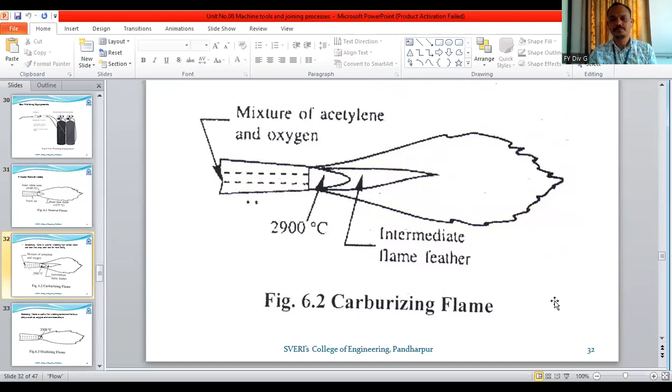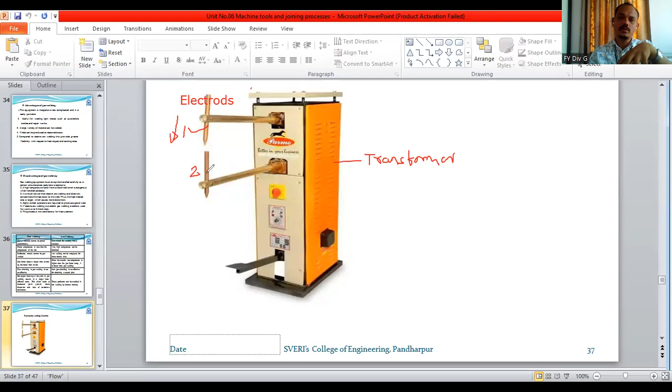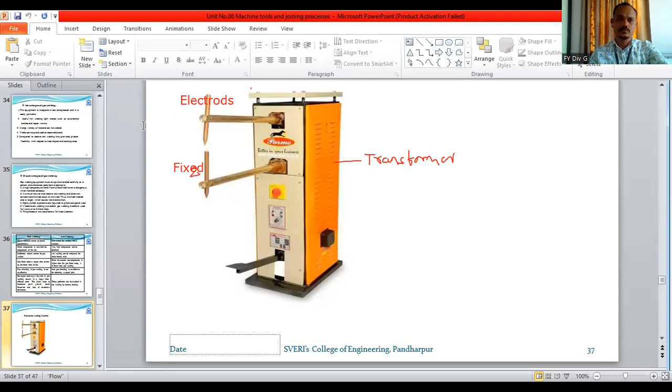And the lower electrode, this second one, is the fixed electrode. This one is movable, and the lower one is fixed. Here we have the pedal.

So this one is the pedal. This pedal is foot operated.

Now what happens? This is resistance welding where we provide the current, but here we are not melting the workpiece. As previously in arc welding and gas welding we are melting the workpiece, or melting the electrode or filler metal, and then we allow the joint to cool. Correct? Yes sir. But here we do not require filler metal also, and we are not going to melt the workpiece.

We are converting this workpiece up to its plastic level. It means, at the start when I told you about joining processes, there are two types: the first one is the fusion process, where we are melting the metal and by melting the metal we are conducting that joining process. And another process is the plastic welding.

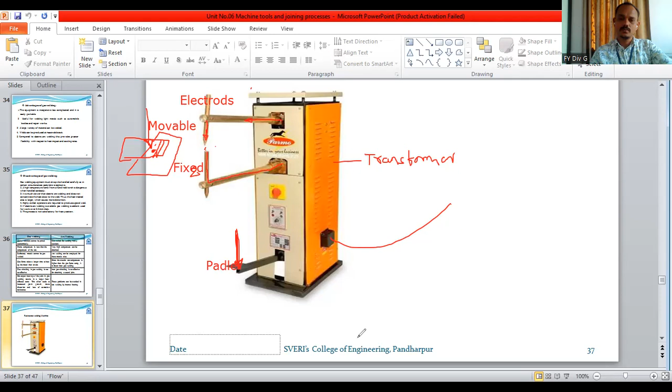See this? So this one is the resistance welding. Whether audio is... No, sir, no audio. Okay, I will stop. And once again.

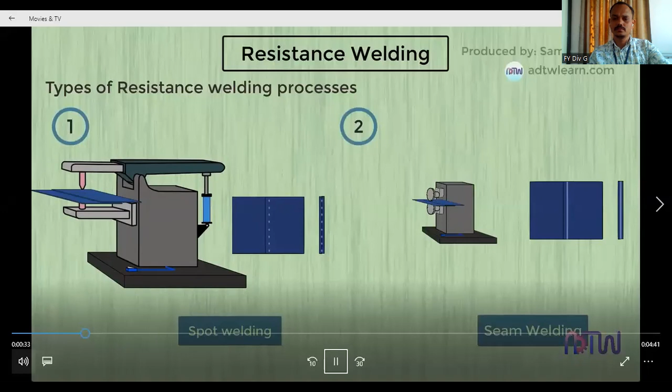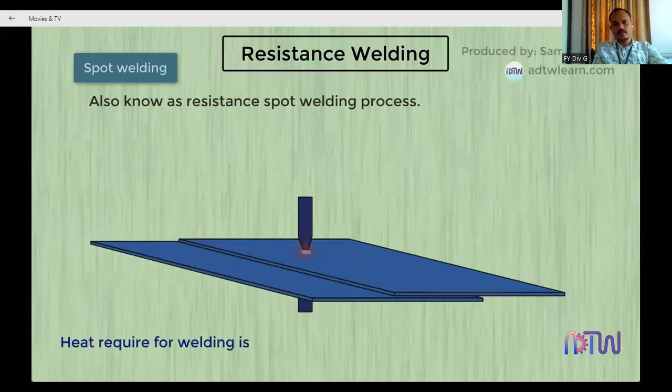Spot welding is also known as the resistance spot welding process. It is used to weld thin sheets of metal together by applying pressure. The heat required for spot welding is generated by resistance to the flow of current through the electrode. This is a very simple working principle.

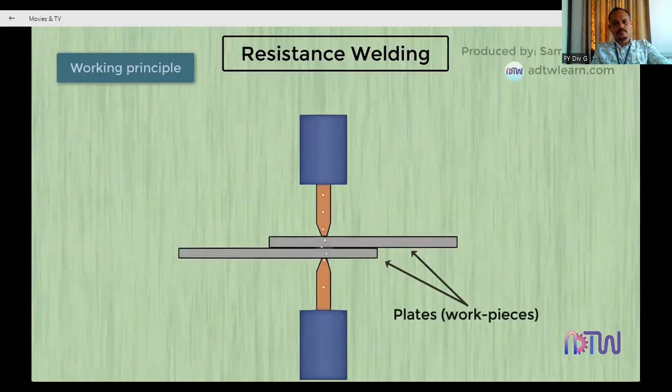The welding electrodes are made up of copper, which is a good conductor of electricity. The movable and fixed electrodes of the spot welding machine are held in pressure on either side of a pair of plates to be welded together. As the current passes, it experiences resistance between the electrode and workpiece contact and generates heat. This heat causes the interface of the workpiece in contact with another workpiece to melt, and pressure fuses the two metals, thus forming a solid bond.

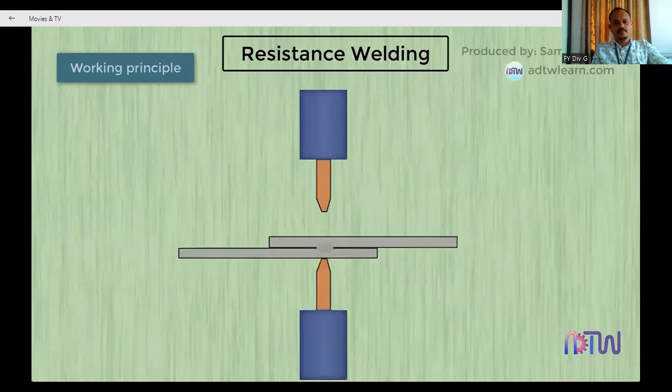Equipment required: spot welding machine, tongs, also known as electrodes. Working of spot welding: when the power is turned on, the transformer supplies low voltage high current to the electrodes made up of copper. These electrodes are held in pressure against the pair of workpieces to be spot welded with the help of tongs.

The current flows from the tongs to the electrodes, as copper is a good conductor of electricity but faces resistance at the point of contact between the two workpieces. This resistance generates heat at the metal-to-metal interface and causes the two metals in contact to melt. Then the pressure causes the molten metal to fuse together, and thus a solid bond is formed.

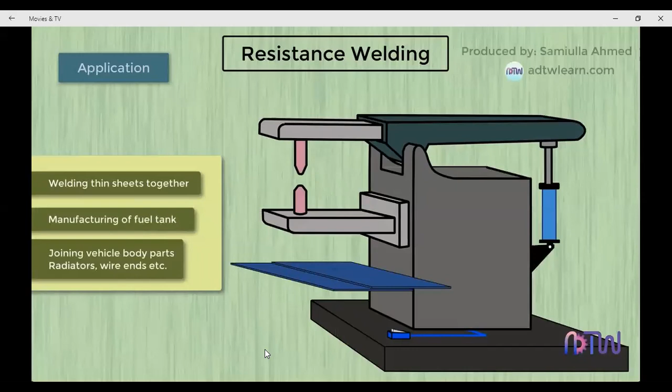Application of spot welding. Spot welding is used for welding thin sheets together, in the manufacturing of fuel tanks, joining vehicle body parts, radiators, wire ends, etc.

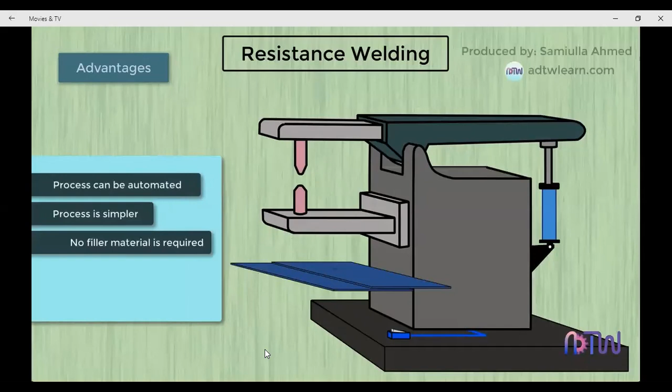Advantages of spot welding: the process can be automated, it is simpler, no filler metal is required, low or no fumes are generated, and a high welding rate is possible.

Limitations of the spot welding process: the initial cost is high, there is low strength due to discontinuous weld, and the process is limited to the thickness of the metal.

Seam welding: the workpiece is supported on both sides by a pair of electrodes. These electrodes are in the form of rollers to produce a continuous weld on the workpiece. Continuous spot welding is known as seam welding.

The working principle of seam welding is similar to that of resistance spot welding. The equipment and components used in the process are the seam welding machine and roller electrodes.

Working of seam welding: when the power is turned on, the transformer supplies low voltage high current to the roller electrodes, made up of conductive materials. These roller electrodes support the pair of workpieces to be welded together.

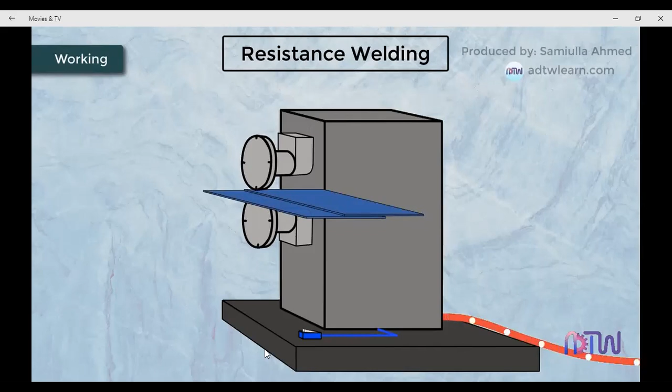When the rollers are made to contact the workpiece, the current flows easily through the roller electrodes with low resistance, but experiences high resistance at the metal-to-metal interface between the upper and lower plates to be joined. This high resistance raises the temperature to the fusion point at the workpiece interface, and a weld is generated in the form of a nugget.

A nugget is the weld formed between the two workpiece interfaces.

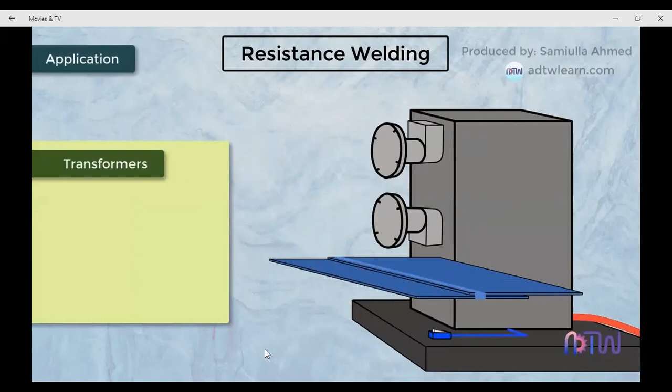Application of the seam welding process: welding of transformers, paint containers, gasoline tanks, automobile mufflers, and sheet metal tanks.

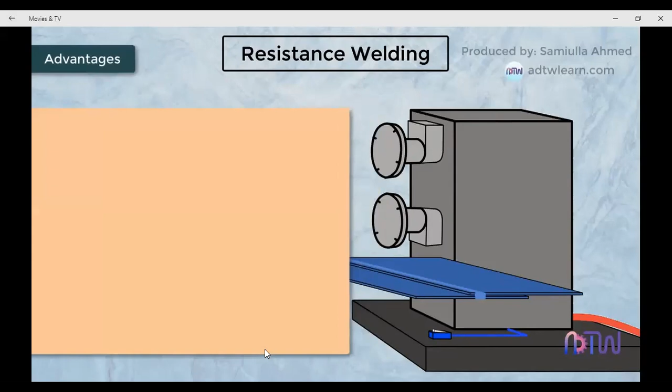Advantages of seam welding: it can generate a leak-proof weld, the production rate is high, dissimilar metals can be welded together, no filler metal or flux is needed, the process can be automatic or semi-automatic, it is possible to weld thin metal sheets, and a semi-skilled person can also produce a good weld.

Limitations of seam welding: the process is suitable only for thin sheets up to a thickness of 3 mm, since the electrodes are in the form of rollers they can weld only along a straight line or well-curved path, and the process is limited to lap joints.

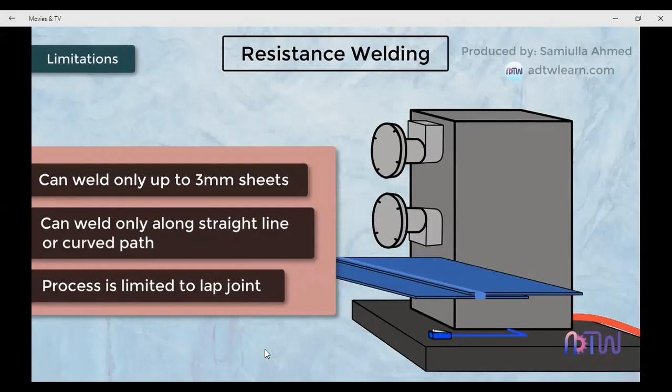I hope you have understood resistance welding and its types. It takes lots of effort.

Have you understood? Yes, sir. Yes, sir. Okay, this is the animation.

Now I will show you a video from industry. One video we have from the industry, so let's see how they do it.

Video this way. Yes, sir. Okay, now you can observe here how in industry this resistance welding machine works, or spot welding. Now see that.

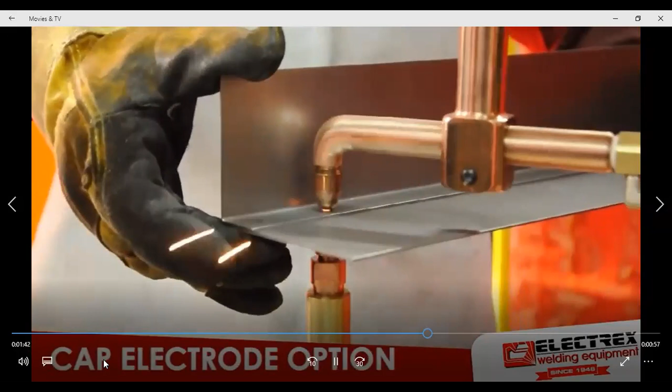See, this one is another operation.

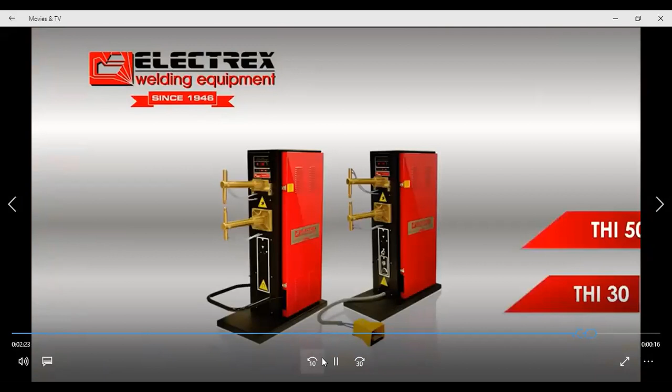Okay, understood? Yes, sir. So this one is the resistance welding, which is used to make some light joints.

If you want to join some structure, like a leaf spring of the truck, have you seen a leaf spring?

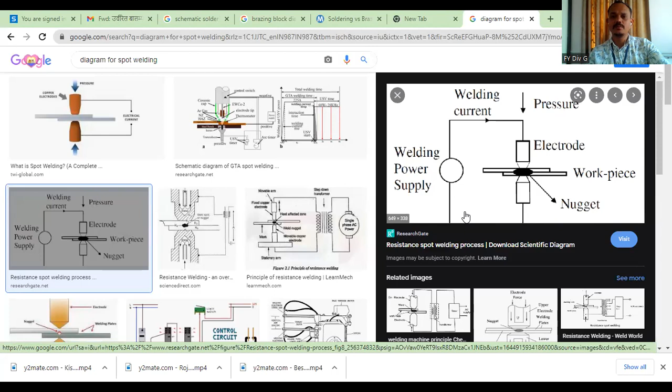Okay, a simple diagram is there. I have chosen a very simple diagram, so you can easily draw it.

One more, this one is also a nice diagram, but the previous one is good. Okay, this one is okay, so you can draw it easily.

Write the heading resistance welding. In resistance welding there are two types: spot welding and seam welding. After that, draw the spot welding diagram.

After completion of this diagram, please tell me.

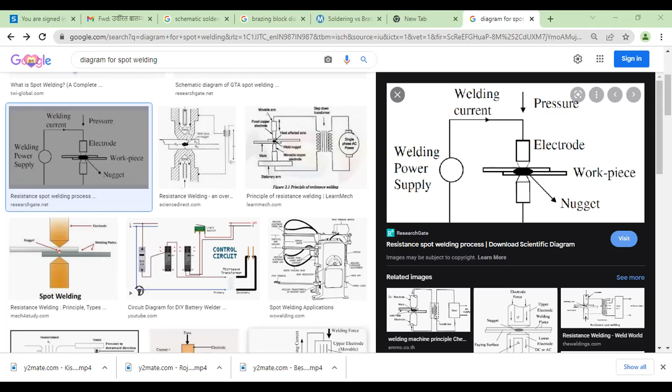So again we will proceed. Now these are the advantages and disadvantages that you have to write. So first advantage, no filler metal required. High production rates possible. Lends itself to mechanization and automation.

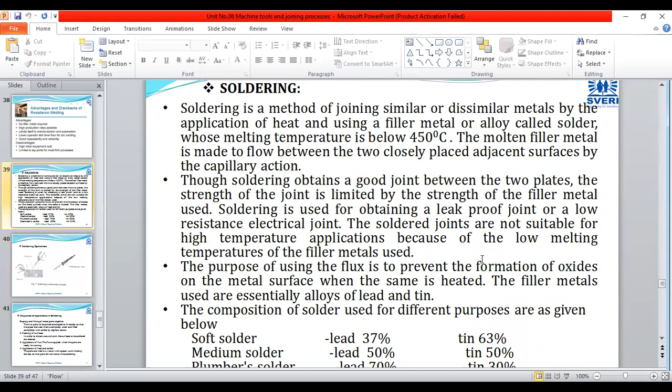So as we are using this joining process up to 450 degrees Celsius, it means we are using filler metal which is having low melting point. So mainly here you can see lead and tin, lead-tin combination filler metal, or that wire. Have you seen that wire? Yes, sir.

But generally, in the local market, we are not choosing that for soldering.

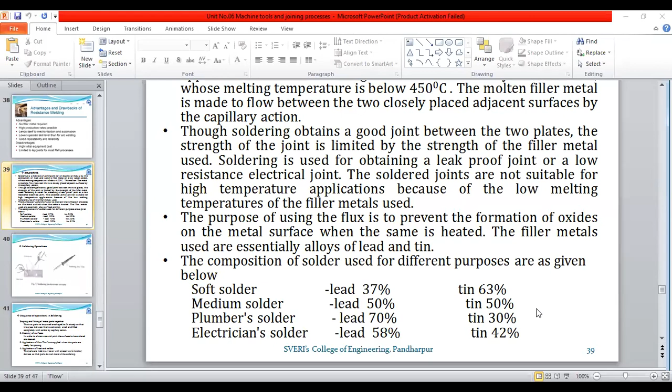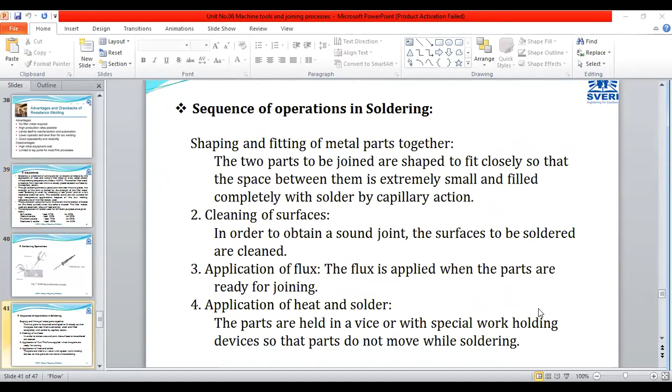So first, the shaping and fitting of metal parts together. It means when we have to do a soldering operation, suppose these two plates are here, like this, and another plate is here, which has a straight surface. If I want to join these two plates, this is the first plate, and this one is the second.

So if I have to join these, is the shape of this plate and this plate similar? No, sir. So what happens when I add filler metal here in between these two? The filler metal cannot create a joint if there is a big gap between the two plates. So for that, I have to finish this surface like this one.

So that after finishing, the plates should keep a very minimum distance between these two. Now I can create a joint with soldering. Understood? Yes, sir. So the shaping and fitting of metal parts together is very important for soldering, because soldering has its own limitations.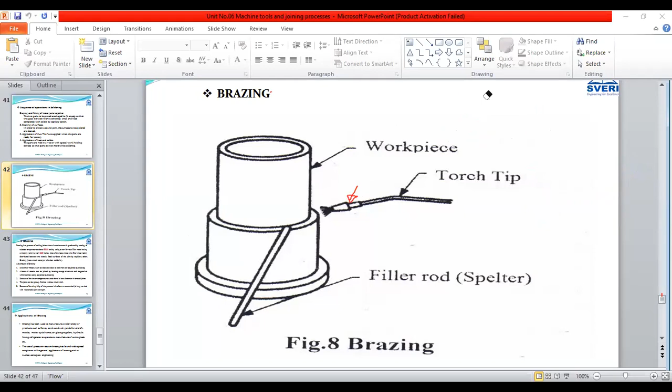Okay, another brazing process is the chemical brazing process. Okay, but we don't want to go that deep. So this one is the simple brazing process. Have you understood this? Yes, sir. This brazing process is the same as gas welding. This is the brazing process, which works above 500 to 900 degrees Celsius. Okay, so I will show you one or two videos so we can understand.

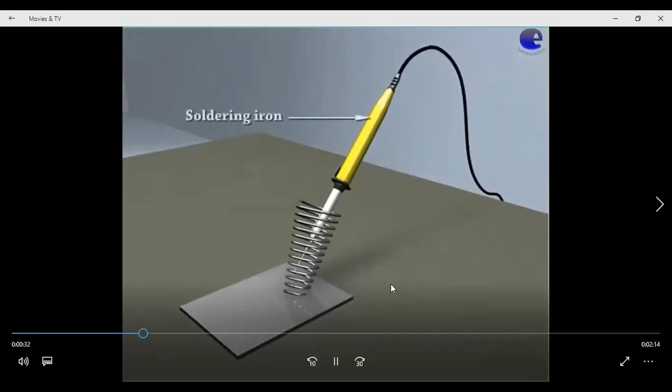Soldering. Okay, is this visible? Yes, sir. So see here, this one is the soldering gun, this is the stand, this one is the IC circuit. Sir, is the solder filler metal aluminum? No, it is lead or a mixture of lead and tin. It looks like aluminum. Okay, sir.

Yes, sir. So this one is the IC circuit. If I want to join the capacitor and resistance on this IC circuit, and if I use arc welding here, okay, what will be the result? Do you understand my question?

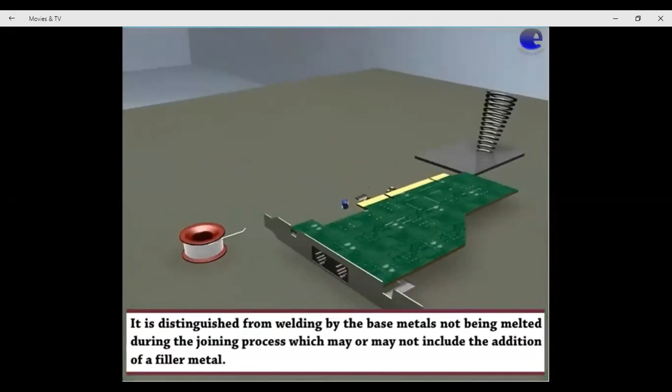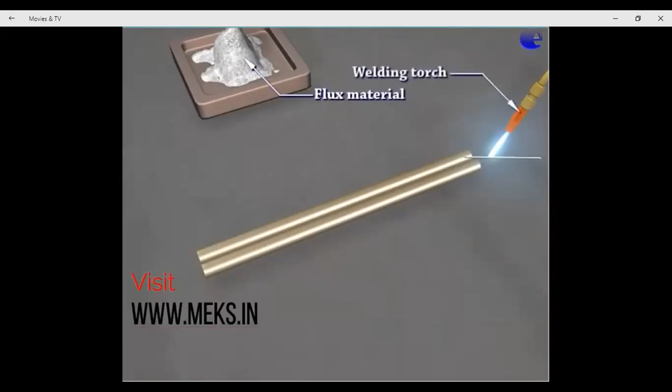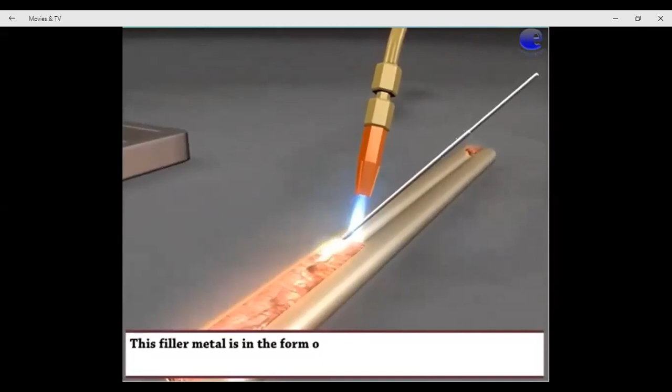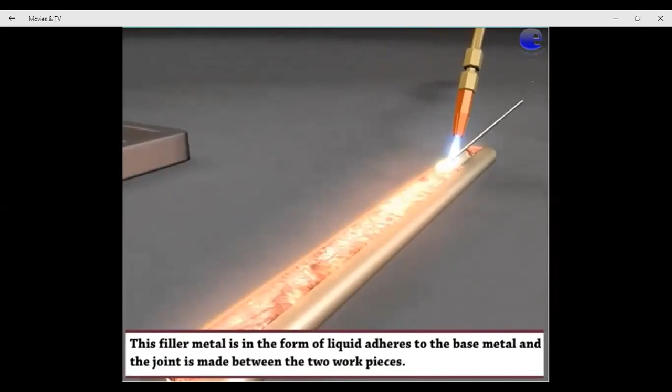Resistor, capacitor. I don't know all the parts because these are from electronics. Some parts I can recognize. So this is also a very simple process. So this one is the brazing process now. Torch brazing. As we are using a torch here, this one is the flame, and here we are melting only the filler metal.

I have one more video related to this. This is the video. This is related to brazing mostly.

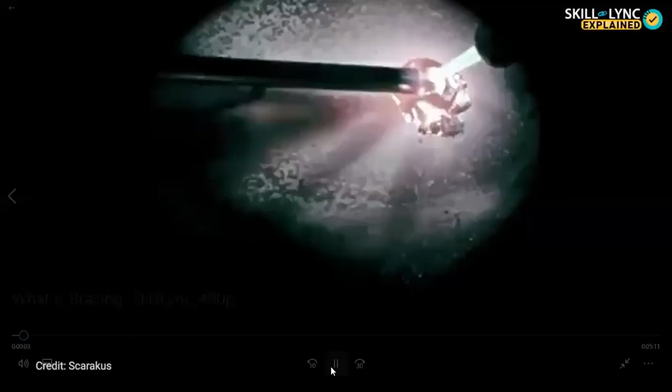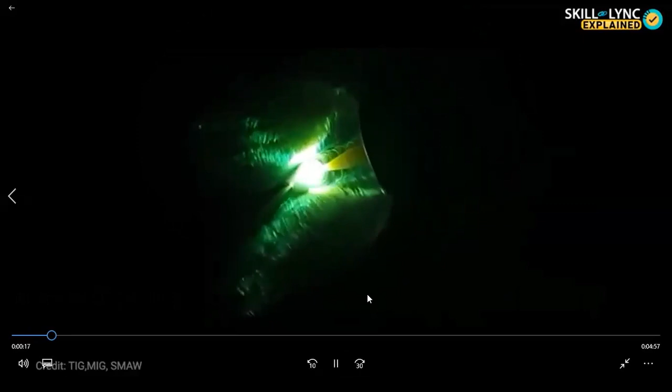Brazing is a type of fusion welding process which is similar to gas welding, yet different. Usually in most welding procedures, the base metal is also melted along with the filler metal. This does not occur in brazing. Here, only the filler material is melted. In brazing, the filler metal, which is also known as the brazing metal, has a melting temperature above 450 degrees centigrade, but it is below the melting point of the base metal.

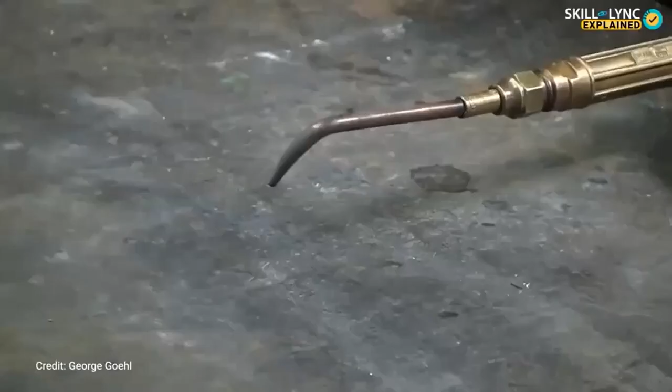There are many types of brazing that are generally available. Each of these types has a specific application. The first type of brazing we will be talking about today is torch brazing.

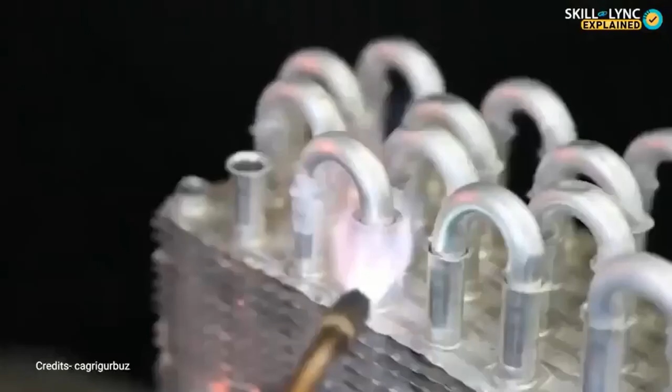In torch brazing, a flux is applied to the surfaces to be brazed. A torch is used to direct a flame against the workpiece and towards the joint. An oxygen-starved flame is typically used to prevent oxidation on the workpiece. Once the joint areas have reached suitable temperature, the filler wire is added. Due to the high temperature, the filler wire melts and creates a joint.

The torch, which is used in brazing, is similar to the ones used in gas welding. The fuels used in the torch vary based on the type of workpiece and filler used. Acetylene is used if the filler or workpiece has very high temperature tolerance, as acetylene burns at almost 3000 degrees centigrade. The torch brazing is mostly performed manually.

The skill of the workers is crucial, as they must be employed to control the flame, manipulate the handheld torch, and also properly judge the temperature of the flame. This is done to ensure that a proper joint is obtained.

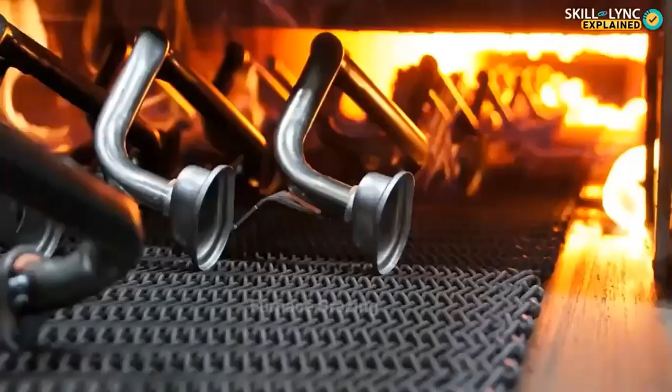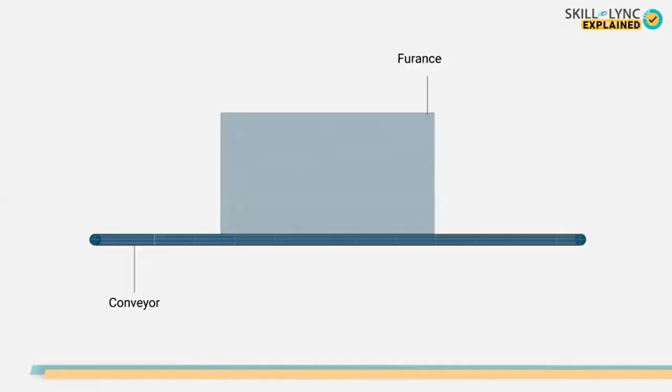Next is furnace brazing. In this type of brazing, a furnace is used to supply heat for brazing and is used to mass produce parts. It is suited for medium to high production rates of components. In furnace brazing, the parts and the brazing metal are loaded into the furnace. They are then heated to brazing temperature. This melts the brazing metal, which fuses the joints. The workpiece is then cooled and removed.

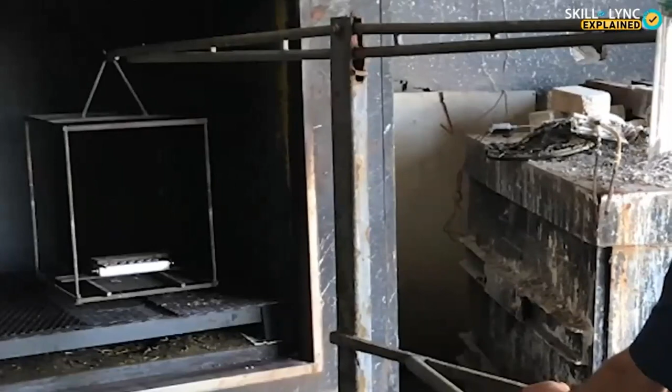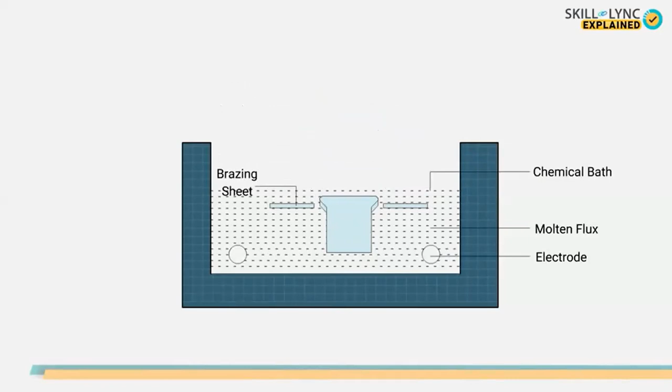The next type of brazing is dip brazing. In dip brazing, a molten salt bath or a molten metal bath is used as a heat source. The workpiece and the brazing metal are immersed in the molten bath. The molten salt bath generally has a molten mixture of fluxing ingredients, whereas in the metal bath method, the filler material which is used to join the workpiece is the heating medium.

The molten metal is drawn into the joint by capillary action during submersion. Dip brazing method is generally used in places where the workpiece has a lot of joints. So, by dipping it in salt or metal baths, it is much easier to fuse the joints faster.

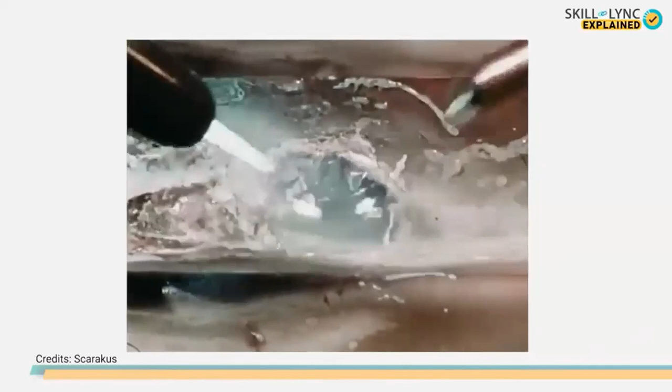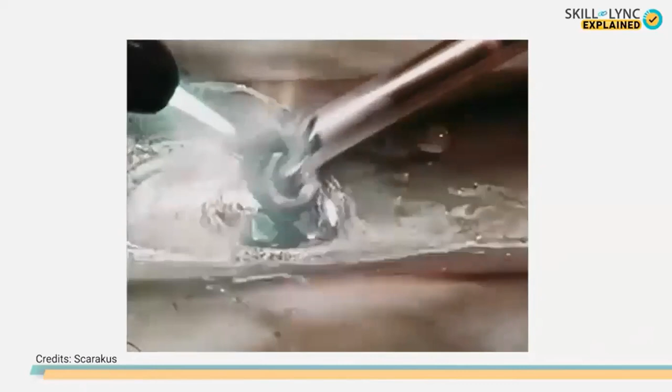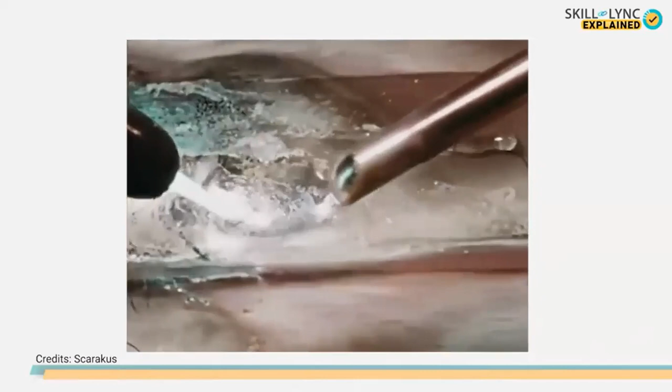The next type of brazing is called braze welding. Braze welding is somewhat similar to gas welding, where a filler wire is used to join two or more pieces of material. In gas welding, both the base metal and the filler are melted and then fused together on solidifying. Whereas in braze welding, the joint consists only of filler metal. This is because the base metal does not melt and therefore is not fused to the joint as in conventional fusion welding processes. Braze welding is most commonly used in repair work of pipes, beams, etc.

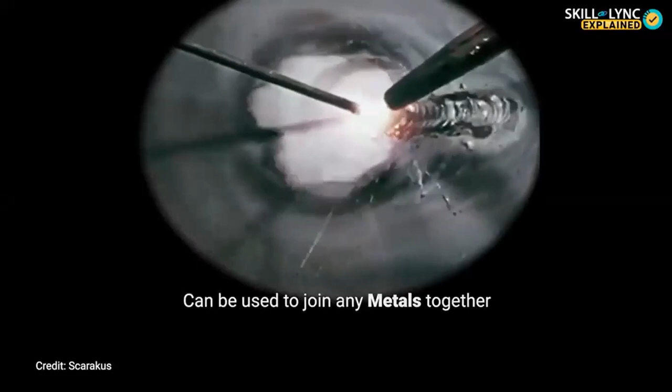Brazing has several advantages when compared to welding. Any metal can be joined with the help of brazing, including dissimilar metals, whereas this is not possible in most welding types. A few brazing methods like furnace brazing and dip brazing can be performed quickly and consistently. This permits very high production rates and allows the process to be automated. Some methods also allow for multiple joints to be brazed at the same time.

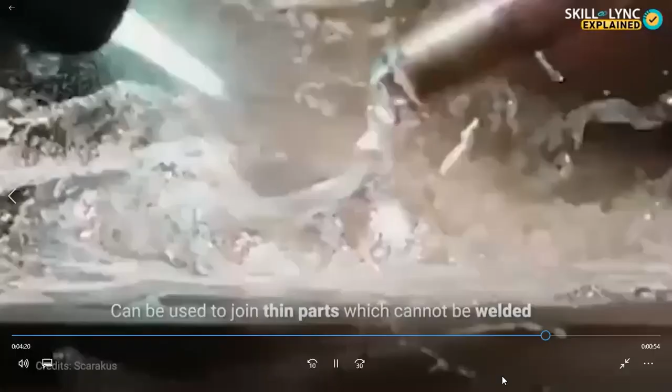Brazing can be applied to join thin parts which cannot be welded. This is normally done by infrared brazing, where an infrared lamp is used to generate heat. Brazing in general also requires lesser heat and power than most fusion welding processes. But the downside to these advantages is that the strength of the brazed joints is lesser than the welded joints.

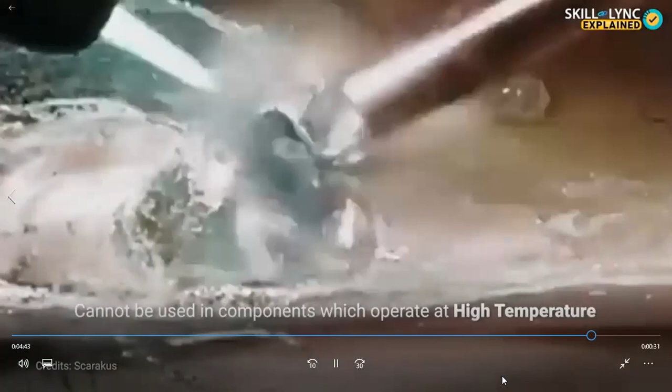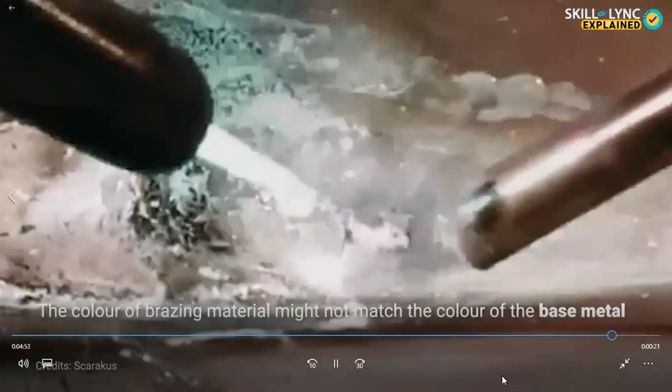Brazing cannot be used to join components which are required to operate at locations with high temperature. This is due to the low melting temperature of brazing metals. Another intriguing disadvantage of brazing is that the color of the brazing metal and the base metal might not match sometimes. This might not be aesthetically pleasing at some places.

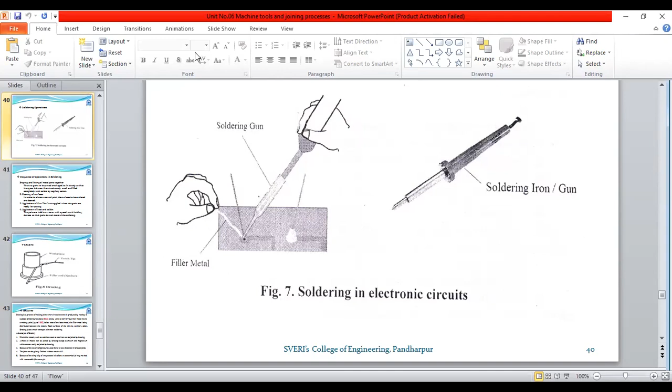With this, we have completed the sixth chapter, that is manufacturing machine tools and joining processes. So in machine tools, we have seen two important machines, that is the lathe machine and the drilling machine. In that we have seen construction of the machines and what operations we can perform on the lathe machine and the drilling machine. After that, we have seen joining processes. There are two different types of joining processes. First one is permanent joining and second one is temporary joining.

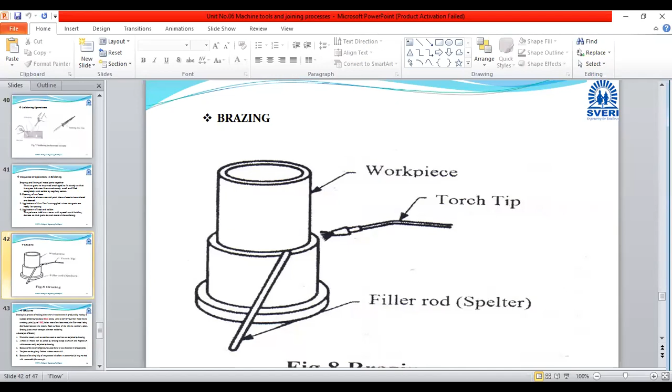In permanent joining, in our syllabus, we have arc welding, gas welding, resistance welding, soldering, and brazing. For heavy joining, we require arc welding and gas welding. If we do not have power supply at that time, we can use gas welding also.

Resistance welding is the type of welding where we are not using filler metal. Only with the help of resistance to the current, we generate heat which converts metal into its plastic state, and then we apply pressure to create the joint. Then two more processes of joining, that is soldering and brazing, we have seen in today's lecture.

So with this, we have completed. Sir, this lecture is completed, but will you continue? It's almost done. If required, we will continue the next chapter. Otherwise, we will see what to do.

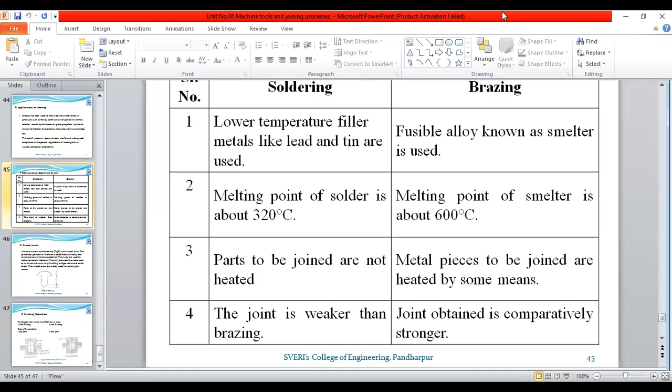Over. Yes, sir. So I think instead of starting a new chapter, we will stop here. What is your opinion? Stop, sir. Yes, sir.